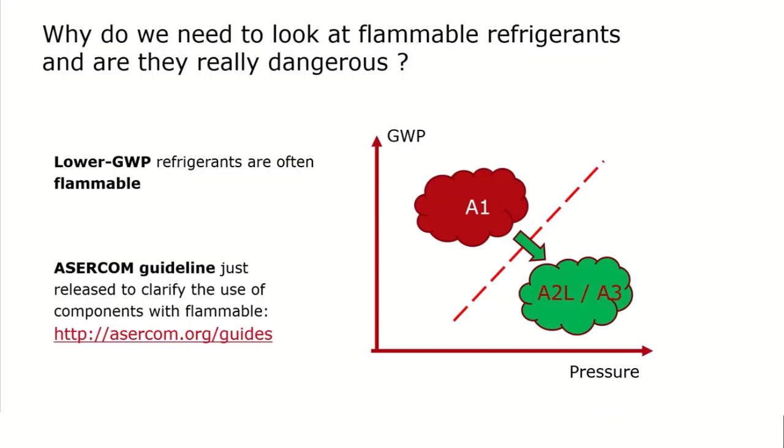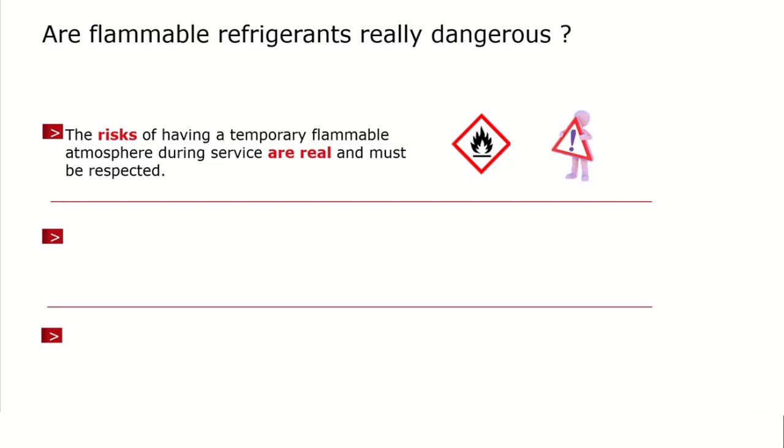Coming back to the question, are these flammable refrigerants really dangerous? Well, there is a real risk of having a flammable atmosphere when you work with these refrigerants. So the risk is real and must be respected. To make sure that you can work safe, it is necessary to follow service guidelines. It is necessary to avoid ignition sources, and it is necessary to secure a good ventilation wherever you work.

To be aware of what you do, please learn about these new refrigerants, their names, their properties, and so on, and be aware of regulations and standards relevant for these flammable refrigerants and their systems.

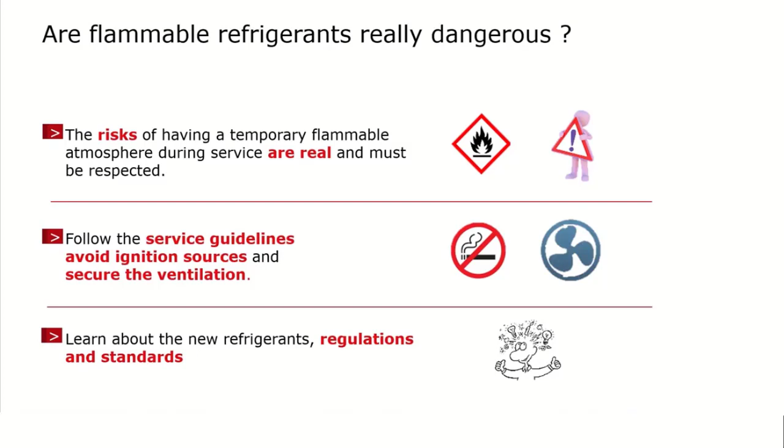Coming back to avoiding ignition sources. When you do service, when you work with flammable refrigerants, there are some things which really need to be avoided. Hopefully it's pretty clear to everybody that an open flame, whenever you can have an explosive atmosphere, is not acceptable. So open flames is a no-go. The same accounts for smoking. No smoking whilst you do a service.

Then welding, cutting. That generates a lot of sparks. These are ignition sources, so that needs to be avoided. Hot surfaces. You always can have a surface that gets hot. It's necessary to make sure that the maximum temperature of your hot surface is at least 100 K below the so-called auto ignition temperature. You will hear a few words about that in a minute.

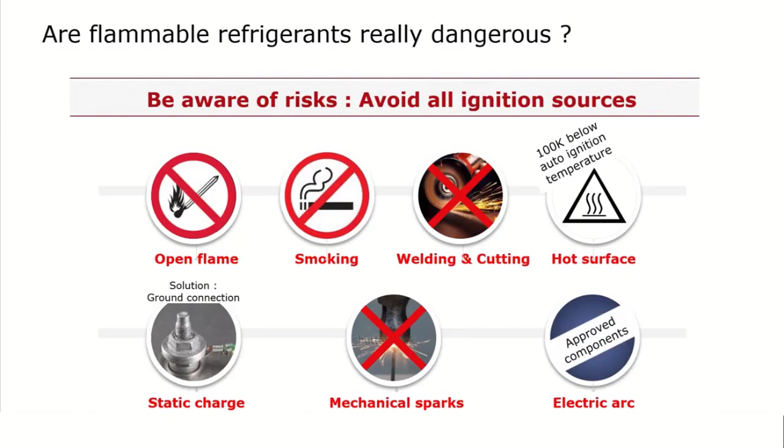Then static charges. It is necessary to avoid these static charges. If you ask how to do that, well, establish a good ground connection. With a good ground connection, you can avoid these static charges. Mechanical sparks need to be avoided, and that can be done by using the right tools which do not create mechanical sparks. Of course, the same goes for electric arcs, because they are good ignition sources as well, and electric arcs can be avoided by using approved components only. A few words about that later on as well.

Going to the auto ignition temperature. That is a temperature where material ignites itself without any additional spark. So if it's getting warm enough, it just ignites itself. And for flammable refrigerants, that auto ignition temperature exists as well. And you see here some examples of these auto ignition temperatures. You need to make sure that your maximum surface temperature of anything you work with is at least 100 K below these temperatures mentioned here.

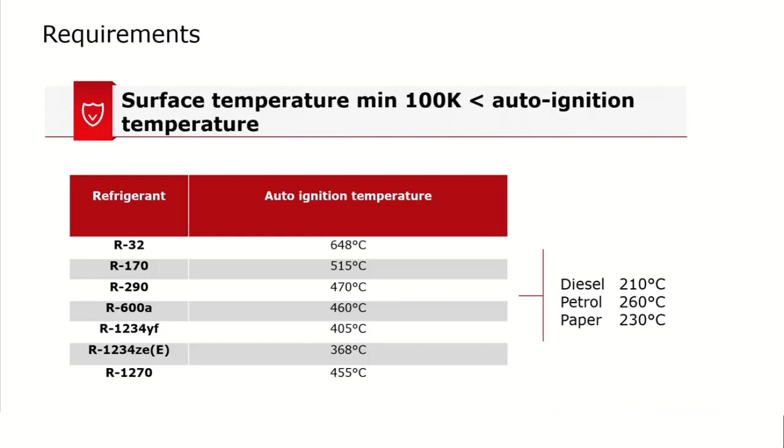To get a bit of a feeling whether that temperature is high or not, now on the right hand side you see 3 temperatures for materials we are pretty used to: diesel, petrol and paper. They are a good deal lower than the auto ignition temperatures of flammable refrigerants, so we should be able to fulfill that requirement.

Talking about components approved for flammable refrigerants, please always use components that are approved for the refrigerant you want to use. If we look at smaller compressors, you quite often find that the relays are directly mounted on the compressor. Of course, relays could generate sparks, so they are nice ignition sources. But how does it come that it is possible to mount them direct on the compressor then? Well, the answer to that is simple.

These relays, they need to comply to a certain guideline, and they need to be manufactured according to that guideline. And only the relays which are approved for the compressors with the flammable refrigerants are manufactured according to that guideline. So if you look at these relays, they look quite similar to a standard relay, a relay for a non-flammable refrigerant. How you tell them apart is the code number. So please use the specific code number approved for that compressor that you are using.

That means no other relay that looks similar or is an old relay from a collection box where you have collected some relays which seem to work still from an older system and let's put them on that compressor. No, please, only those relays which are made for that specific compressor. Only then you can be sure that you have a safe system.

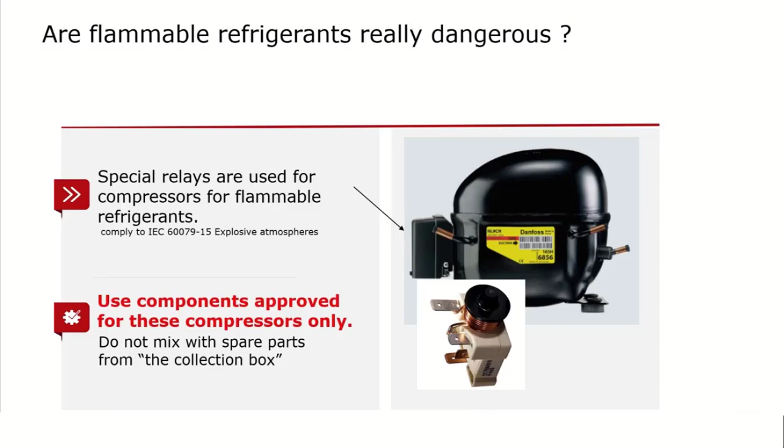Few additional words. Flammable refrigerants, please use them in new systems only which are designed for these flammable refrigerants. That means do not retrofit systems from A1 refrigerants to flammables. The reason is that these systems are not designed for the use of flammable refrigerants. Neither the layout is necessarily made for it, nor the components, so only for new systems.

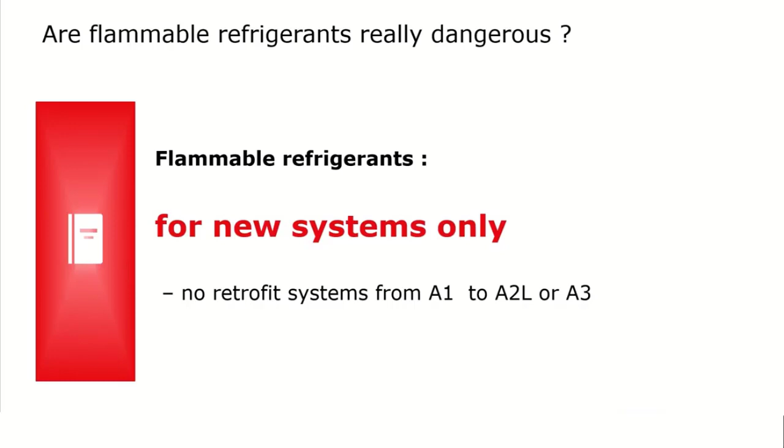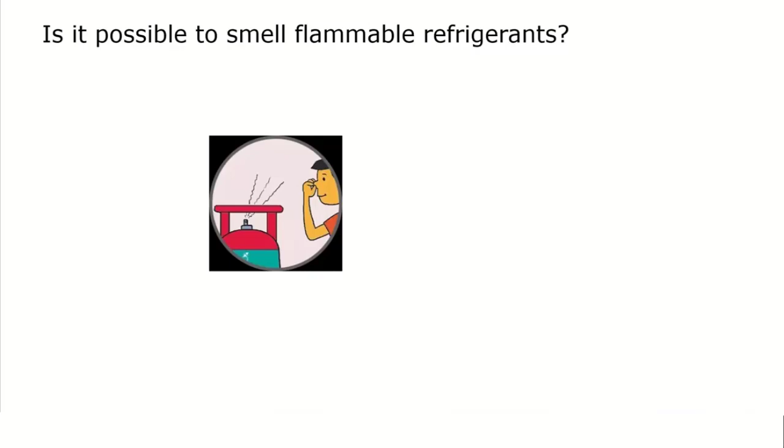Then somebody might say, yeah, but I can smell flammable refrigerants, can't I? I mean, propane, you can use that for barbecue and you can smell that, so it is possible to smell it. Well, wait a minute, because that propane that you can smell, that is only when it is used as a barbecue gas, a cooking gas, or a heating gas. The smell is a chemical that is added to the gas to make it smell. The gas itself does not smell. It's the added chemical you smell.

For refrigerant grade, there is no added chemical because you want to have the gas as pure as possible. So no chemicals are added. That means the refrigerant grade propane, for example, does not smell. You need to have a gas sensor to have an identification whether you have propane in the atmosphere or not. You cannot smell refrigerant grade propane.